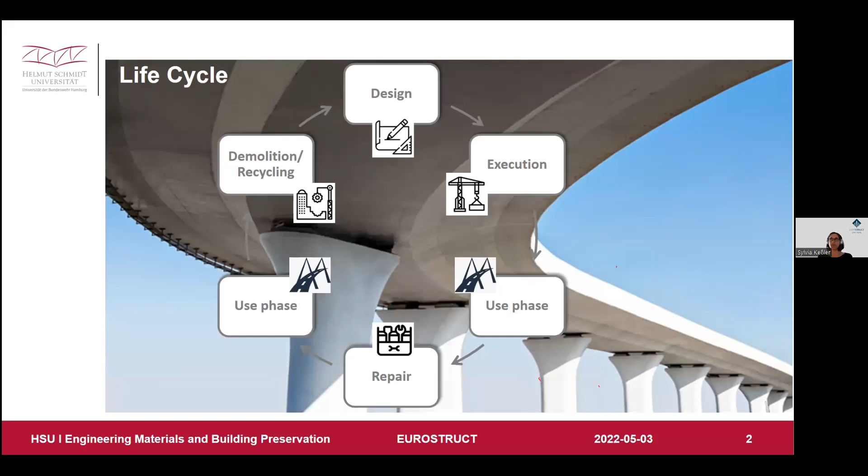Now, since today's topic is reinforcement corrosion, the question arises: when are we really concerned about corrosion? When do we think the first time really about corrosion? I would assume, perhaps it's a little bit offensive, I would say you think about it first in the use phase, just when you start to see it.

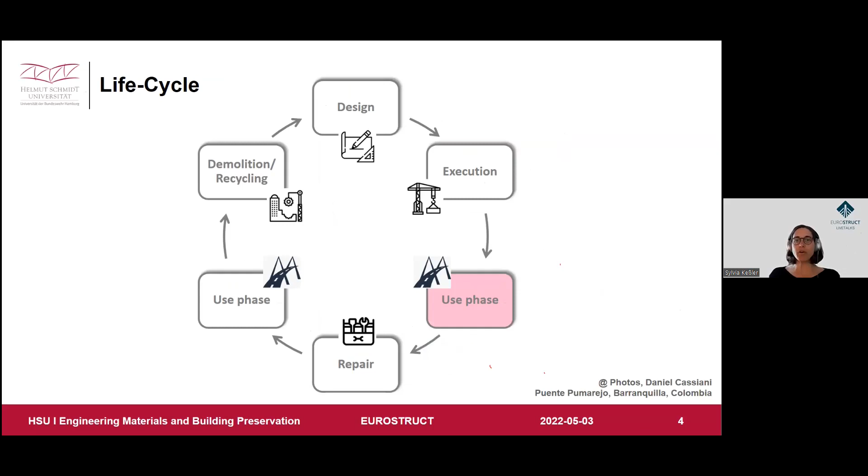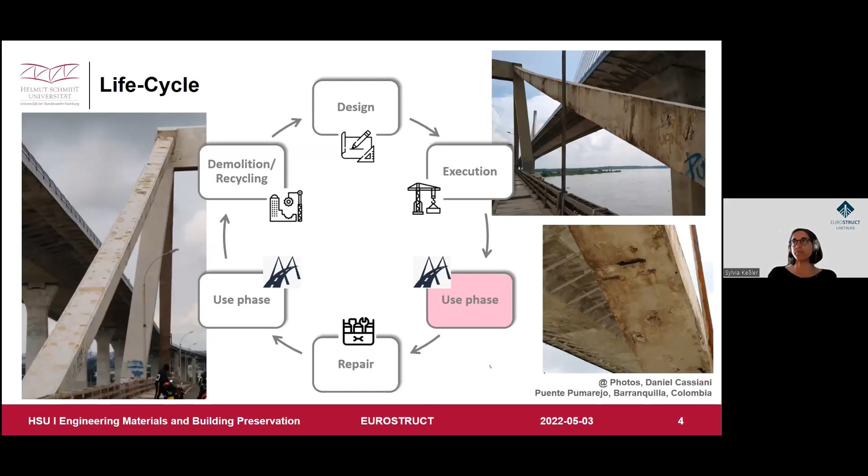Now you're thinking, are we still safe? What is really the condition of the structures? But is it the right time to think about corrosion? We need to think about it much earlier, already at the design stage.

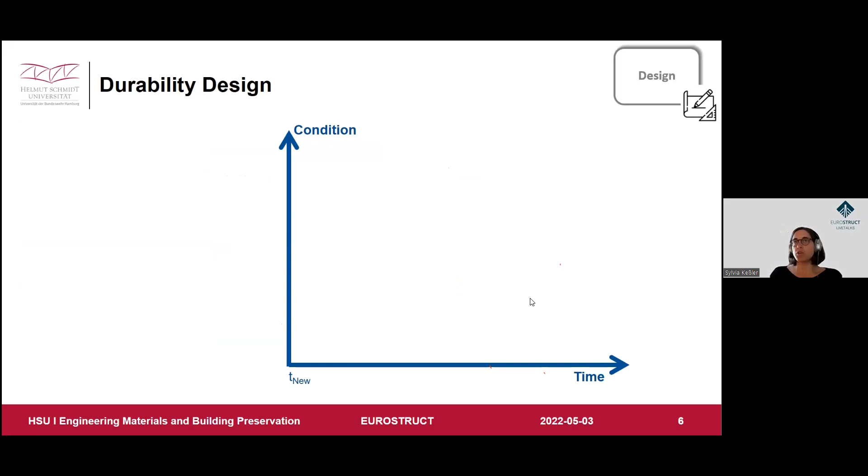But what do we do normally? We are a little bit, how to say, used to just apply the exposure classes according to the Eurocode. We know that we have a certain service life that we need to ensure, and a certain condition. During this design stage, we think, okay, we have our service life, let us just apply the exposure classes.

Since we talk today about reinforcement corrosion, we have only to consider the XC, XD, and XS classes. For those not familiar with the Eurocode, since I'm talking from that perspective, this class is concerned about carbonation-induced corrosion, here about de-icing or the ingress of de-icing salts, or the ingress of salts from the marine environment.

We are very used to choosing just the concrete composition or the concrete cover depth, which is assigned to each exposure class. This is how we do it for years now in Europe, and we apply it, and we do not think about corrosion anymore. But whether this ensures at least a minimal nominal condition, we do not really know.

The descriptive durability design will give us no further clue. What we could do is apply probabilistic models in order to estimate our reliability or failure probability.

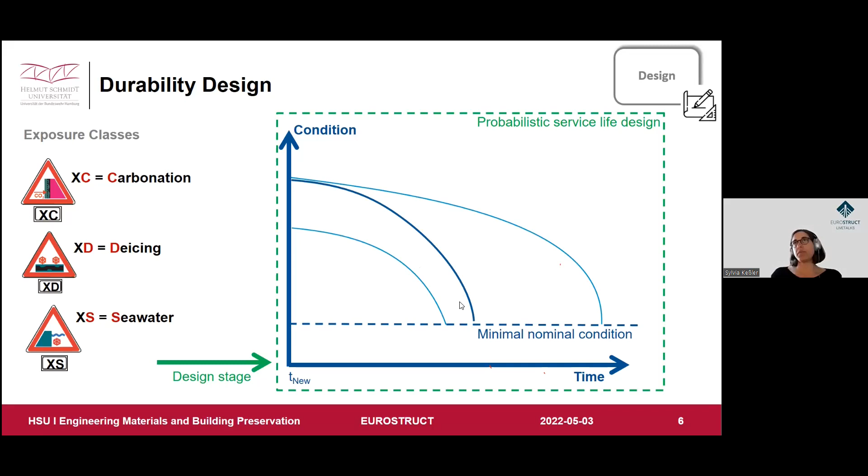Every time I talk today about failure probability, it's always meant as corrosion probability, so the probability of reinforcement corrosion. What we did in Germany, at least I used as background information for all the probabilistic modeling, because I do not want to go into detail during this talk.

You will find the FIB model code for service life design, the model code 2010, and you will have some more further information in the more recent Bulletin 76, which supports you if you would like to do your probabilistic modeling yourself.

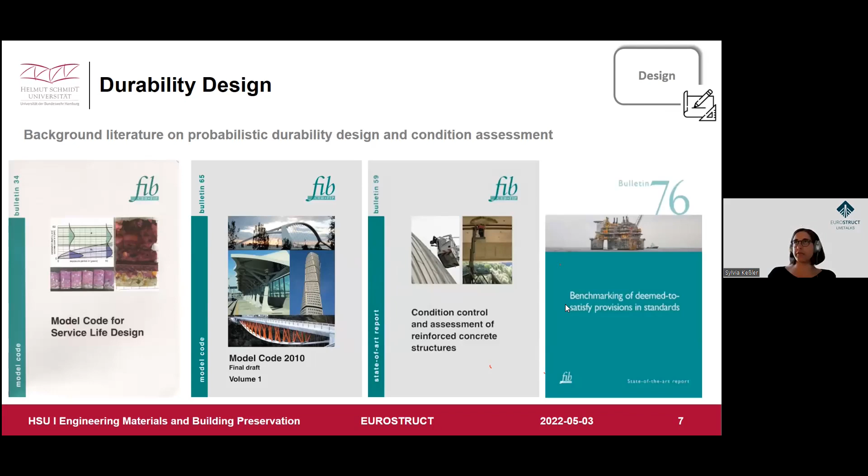We had a project going on in Germany, and we would like to consider what are really the exposure conditions we have in Germany. On the northern part, we have the seas, the marine environment, so here we have really to be concerned about chloride-induced corrosion. In the south part, we have a lot of snow, harsh winter times, and here also a lot of de-icing salts are applied on the streets to ensure traffic safety.

We looked at what are the typical stresses we have with regard to corrosion, and we compared this to the material resistances which are allowed according to the Eurocode. The result was kind of surprising.

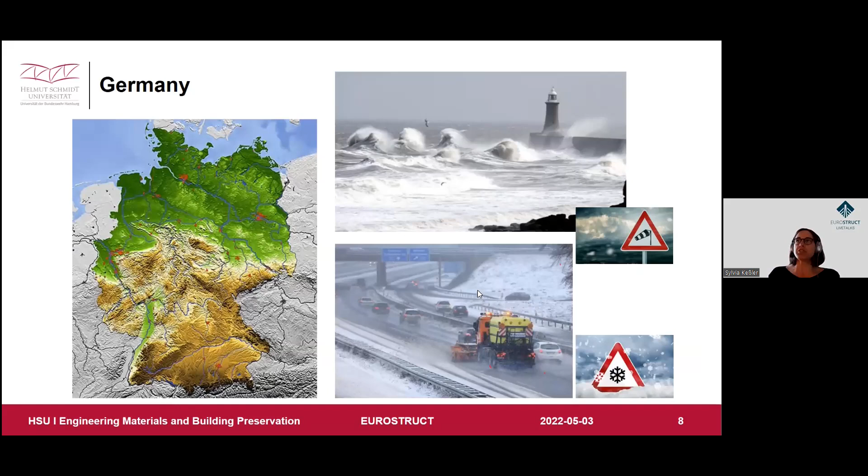As the next step, normally, if you have a reinforced concrete structure assigned to exposure class XC4, especially for bridges, it's normally also XD3. And since XD3 requires harsher material resistances, you have to build a better concrete, which also normally has better resistance against carbonation.

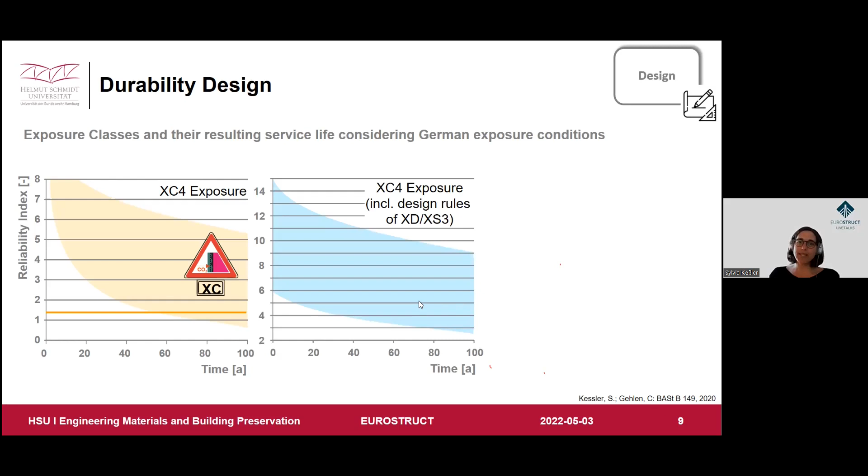But at the end, the most important thing is what's going to happen with the XD3 or XS3 exposure. Under this exposure class, we normally have cyclic wetting and drying in combination with exposure to chloride ions, and this is the most severe environment you can have when concerned about reinforcement corrosion. You see that the scale of the reliability index has already changed.

This is the range of reliability you can get just applying the Eurocode exposure class rules in order to ensure normally a service life of about 50 years. You see here the normal limit state, the reliability index of 1.3, which is equivalent to more or less 10% of failure probability, so 10% of corrosion probability.

Looking at this diagram on the right-hand side, if you are in charge as an asset owner of bridges, you need to be concerned about reinforcement corrosion. This is so likely to happen, especially if you have exposure class XD3 or XS3. So you have to face reinforcement corrosion with a very high probability.

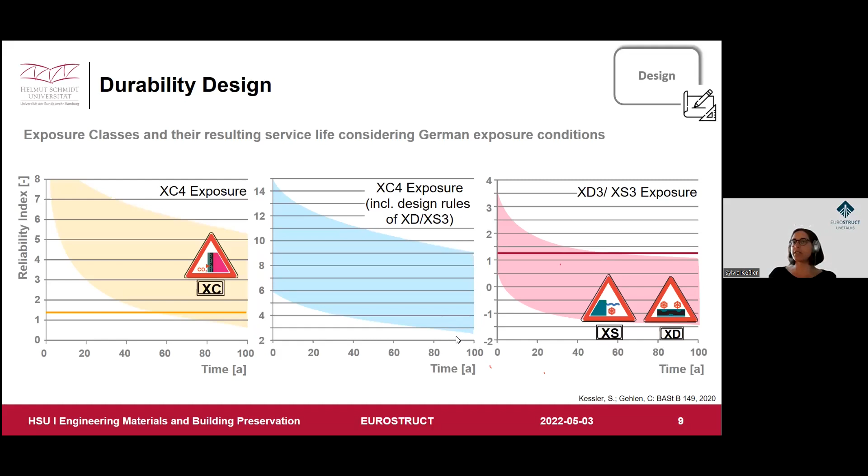We're concerned that our prescriptive durability design rules are not able to ensure a repair-free service life, which they should. Hopefully we will change soon from our prescriptive durability design rules to load and performance-based durability design rules, which is already in preparation. So we have very high corrosion probability, which means we have to be concerned, especially during inspection and monitoring, about what kind of methods we can apply.

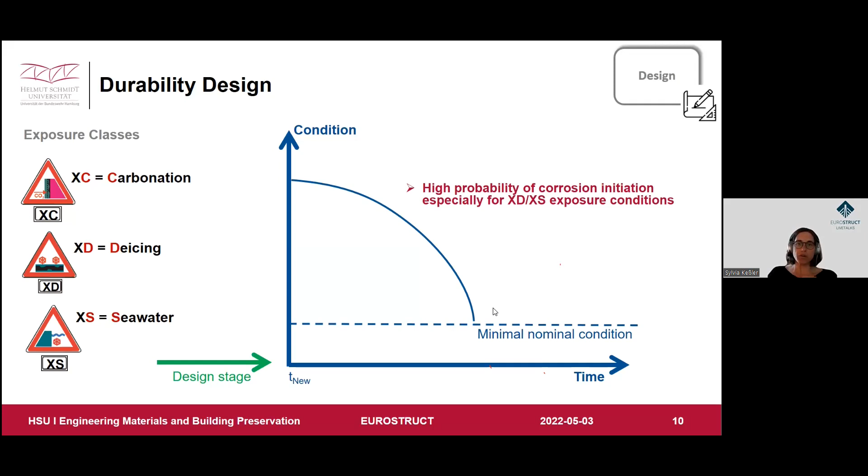So what is really the mechanism when we look for reinforcement corrosion? You probably have seen the Tuutti diagram several times already, so we have the initiation phase and the propagation phase. The initiation phase ends with the depassivation of the reinforcement.

Here I bring you some comparable sketches, because normally the concrete provides high alkalinity, which leads to the formation of a microscopic oxide layer. With this passive film, as we call it, we have corrosion protection.

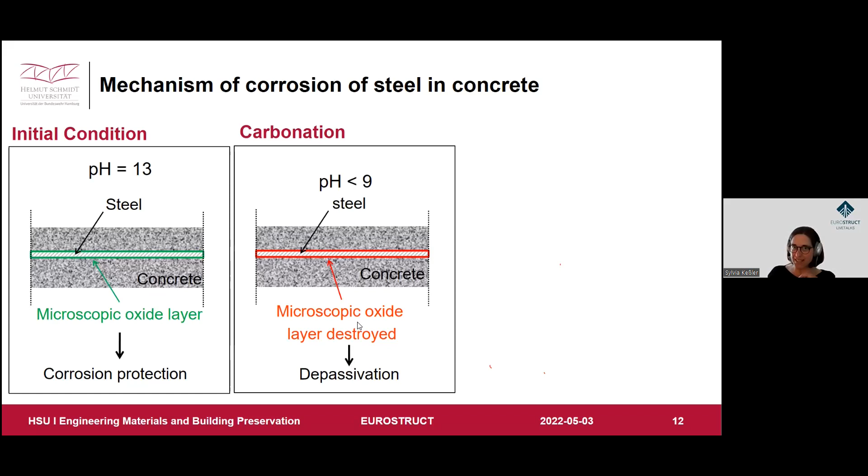Now we have two mechanisms, which we already heard from the exposure classes. We have carbonation, which leads to the process that the alkalinity gets lost, and the microscopic oxide layer, which normally prevents corrosion, dissolves. So we have a depassivation. The steel is able to corrode, which does not mean that the steel will corrode - other boundary conditions have to be fulfilled.

For the more severe condition, the concrete is still in an alkaline condition, which is often forgotten - it's still alkaline. But we also have chlorides in our system, mostly from sodium chloride from marine environments or de-icing salts. They penetrate through the concrete until a critical threshold is reached at the reinforcement level, and there the microscopic oxide layer will be destroyed locally. So here we have the typical corrosion, which also leads to depassivation of the steel.

All these processes take time. This is something we can see in the Tuutti diagram as well. But what is really the difference between both mechanisms, the carbonation-induced corrosion or the chloride-induced corrosion?

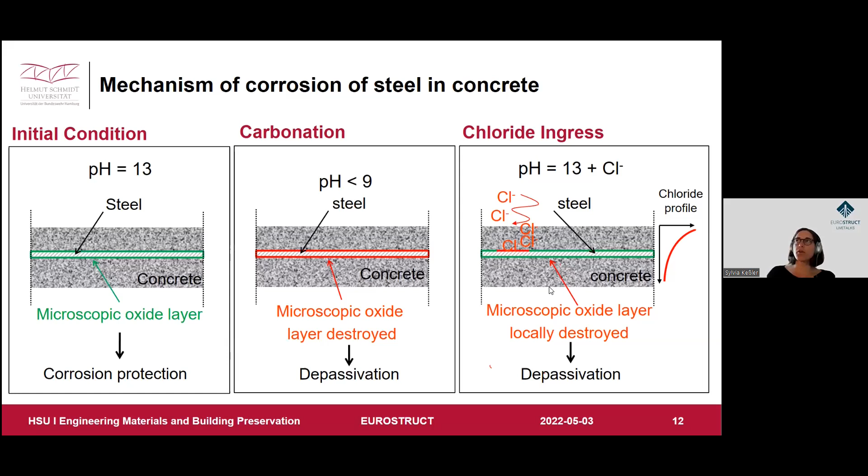Normally we have a very homogeneously distributed depassivation of the steel, so very uniform corrosion, whereas in chloride ingress we have it very locally, as I mentioned before. Looking at the anodic partial reaction and the cathodic partial reaction, these take place at typical different locations. Here it's very distributed equally over the whole reinforcement, whereas for chloride-induced corrosion we have a concentration of the anodic partial reaction leading to the typical pit, which leads to other complications for structural engineering.

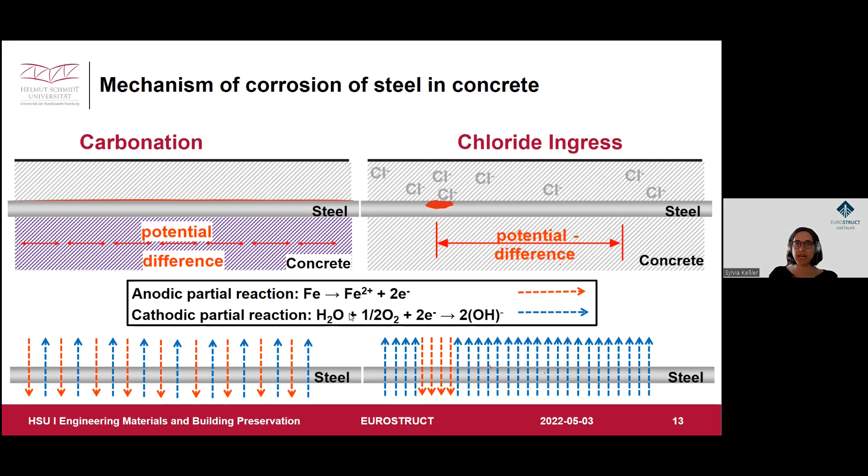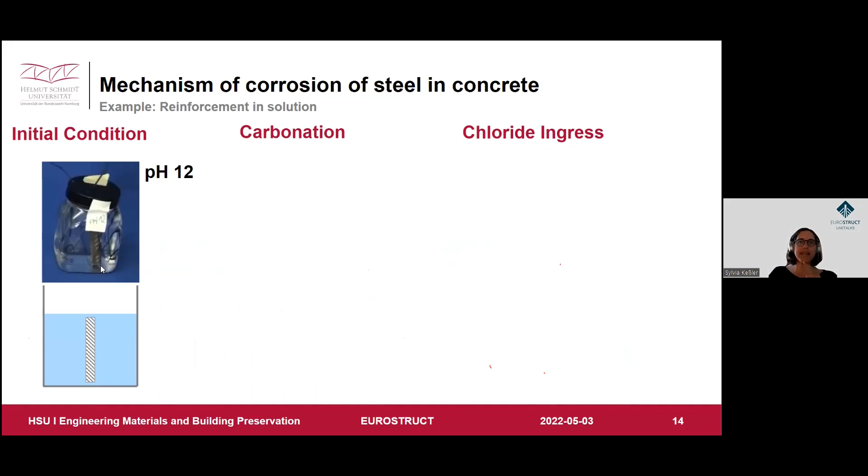And here I promise this is the last chemical equation you will see today. So what I normally do for my lecture is place a normal reinforcement just in a solution with a pH of 12, comparable to the concrete. Here you see the sketch, the water is still colorless, so there was no corrosion product at all.

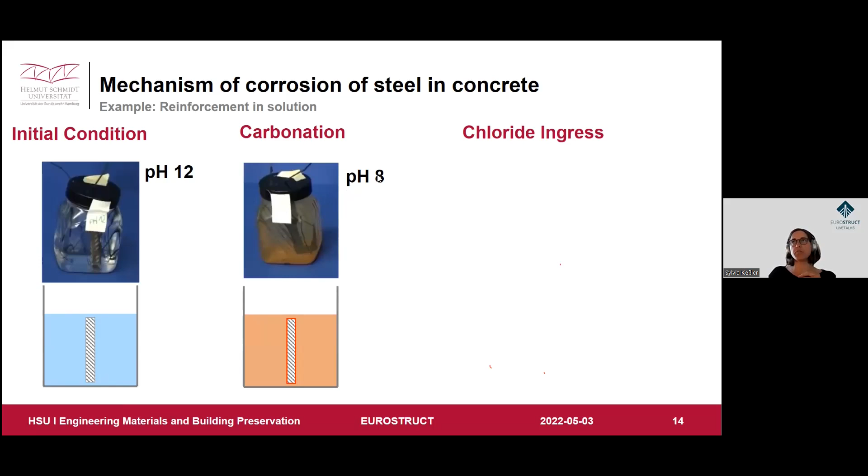From the carbonation, we place a reinforcement in a solution with pH 8, comparable to carbonated concrete. Here we see the brownish color, so a lot of iron oxide has been produced, the typical rust. For chloride ingress, we prepare a solution with pH 12 and add sodium chloride to it. Here we can see some iron oxide products at the bottom of the container.

As soon as we have corrosion, we have a flow of electrons, which you can measure easily as a current. If we do not have any corrosion at all, we won't have any current. For the carbonation case, we measured the current and ended up with 0.36 milliampere. Now you can think, do we really need to be concerned about a corrosion current of 0.36 milliampere? Especially since it's just a current - normally we have to calibrate it against the area to get a corrosion current density. Is it really a lot, or not?

What does it really mean if the structure still has to serve for 30 or 50 more years? And what would you assume now for the corrosion current for chloride-induced corrosion? Do we have any experience? Guess a number, and I will show it directly. Here we have a corrosion current of about 7.39 milliampere.

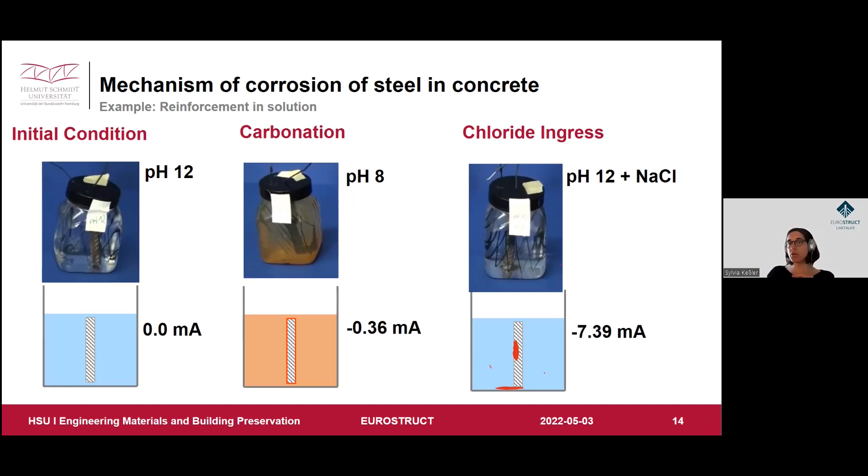So now we know what leads to depassivation, but other boundary conditions have to be fulfilled in order that corrosion can start. We need the electric conductivity of the steel, which is typical and cannot be prevented at all. All reinforcement is normally electrically connected within the reinforcement structure.

We need a certain ionic conductivity of the concrete, so there must be a certain moisture in the concrete, which is normally no issue at all for bridges exposed to weathering. We have normally sufficient ion conductivity. We need oxygen, and normally we have enough. And we need a certain driving potential. Normally all these five requirements are fulfilled easily.

So probably for bridges, with very high probability, as soon as we have deep depassivation, we will also have initiation of corrosion. Keep in mind, all these five basic requirements need to be fulfilled at the same time. If we are able to exclude one of these basic requirements, no corrosion can take place. This is just a clue on how to repair the structures and how to prevent ongoing corrosion.

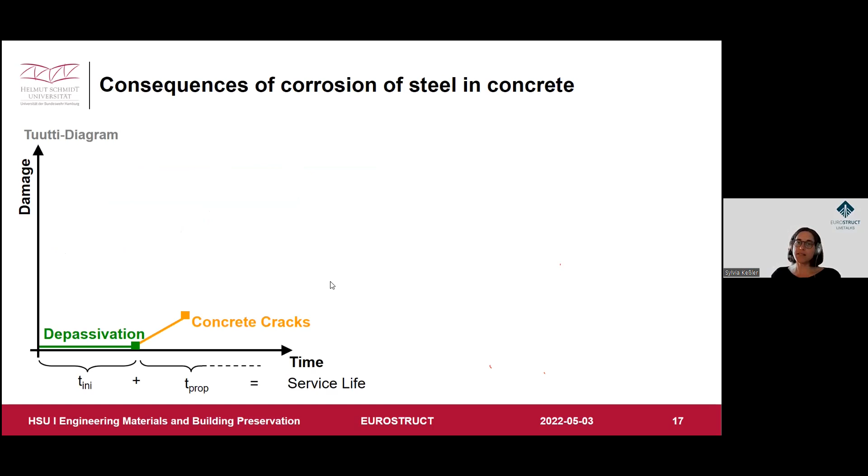So next step, I come back now to the Tuutti diagram. As soon as corrosion is going on, iron products and iron oxide are produced, which need a much higher volume, leading to stresses in the concrete. As soon as all the pores in the concrete are filled with iron oxides, and more iron oxide is produced, the tensile strength of the concrete is exceeded very easily, which leads to concrete cracking, and afterwards to concrete spalling, loss of bond, and loss of cross section.

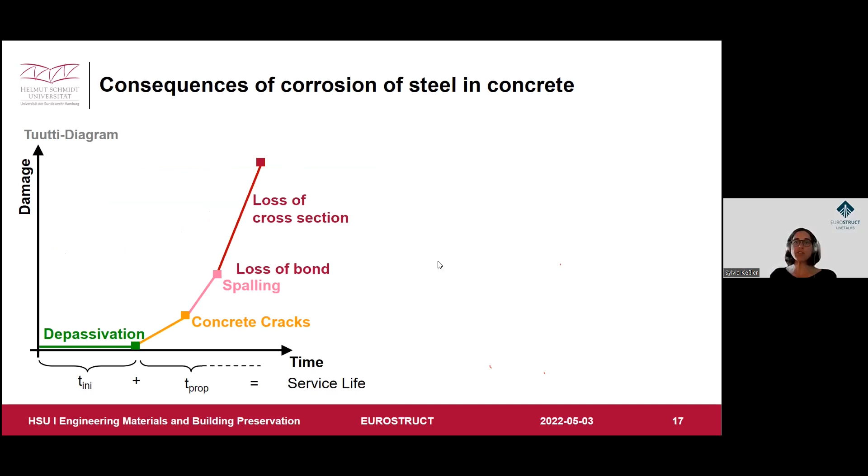Here on the right-hand side we see a picture, which I also like to show normally in my lectures, because here you see all the different steps for the different damages of corrosion-induced damage. Here you see the concrete corrosion cracking, a very clear crack, and the brownish color coming out of the crack, which gives us a hint that here's iron oxide, so corrosion is going on.

Here's spalling, you see the loss of cross-section, and following the shadow, you can see that here's a reinforcement totally missing - it has gone due to corrosion. This picture is from a very, very old concrete bridge from the 50s, and you see very nicely how all these different damage situations look like.

Just from the point of depassivation to concrete cracking, this is the most difficult point to guess the condition of our structure, because corrosion is not visible. If we do not see any cracking, we have no chance to assess corrosion just from visual inspection. This is a critical point where you do not know if your structure is corroding or not.

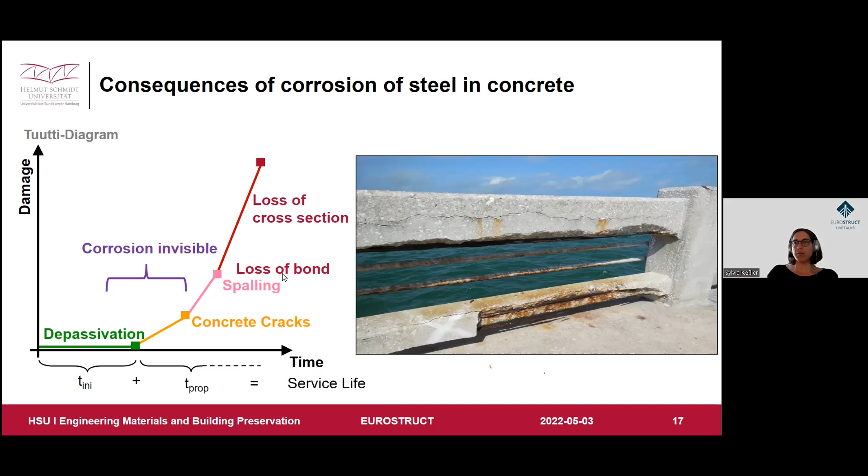So coming back to the life cycle, now we understand the mechanism. We also know that probably the prescriptive durability design rules of the Eurocode are probably not the best way to ensure it. We have another issue with execution, because all the exposure class design and probabilistic modeling relies on having a perfect, crack-free concrete. We know that due to execution, we can have problems with shrinkage or other issues which lead to cracking, and any concrete cracks would enhance the process of corrosion initiation and shorten the service life much more.

But now we are at the use phase, and we know that we have a certain stage or time where we do not see the corrosion. So what can we do? We have here once again the time over the corrosion. Sure, we need to inspect, and we need to inspect frequently in order to get the chance to see how the damage is developing over time.

We also have monitoring, which you can do continuously, even though corrosion monitoring is not so established. We have sensors available to do corrosion monitoring, and I hope it will increase much more in future. But currently, I know very, very few bridges where corrosion monitoring is applied.

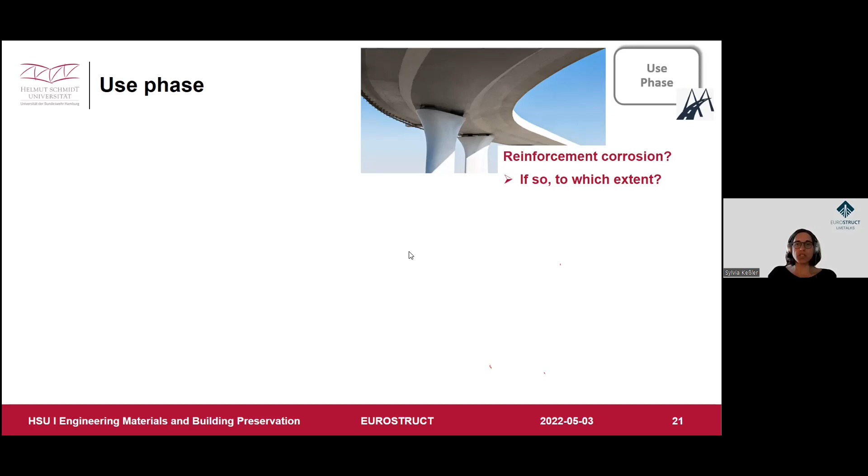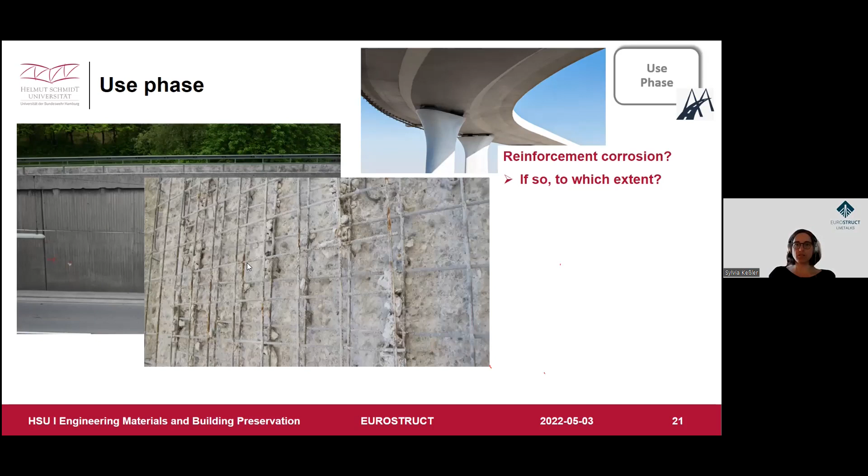Due to some other maintenance issues, they also started to do a corrosion condition assessment, just occasionally, not by intention. They ended up looking at the reinforcements and had to do a total repair, because with a closer look during the repair, you see serious loss of cross-section due to corrosion. We had seen nothing from the outside. The abutment wall is more than 200 meters long on both sides of the street, and you had seen nothing.

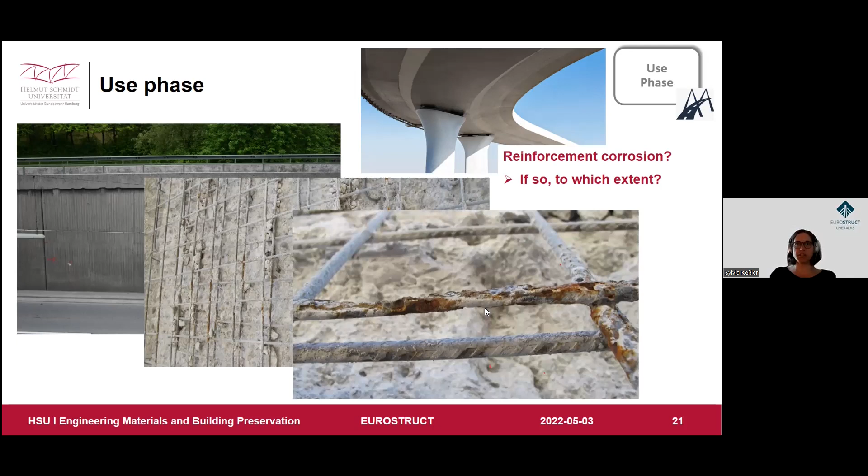So what could we do, or what did we do during this inspection in order to check the corrosion probability? The main question which you always have, if you would like to perform a corrosion condition assessment, is when you should do that. Because we also have annual changes or seasonal changes.

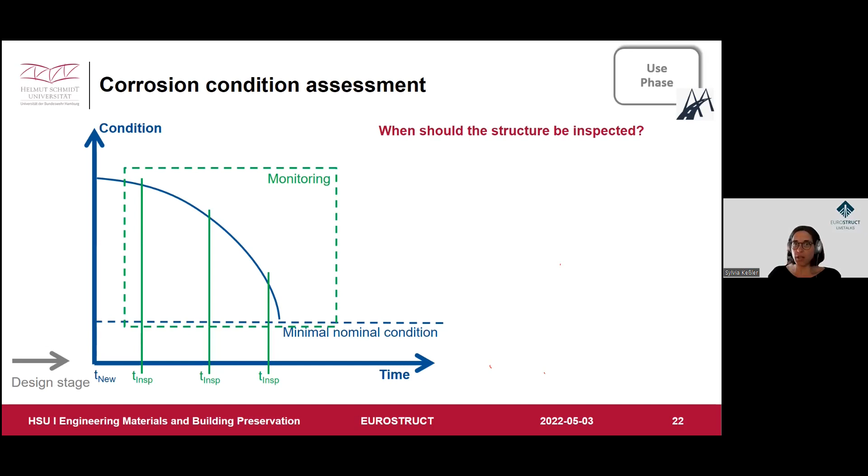Should you do it more in winter time, more during summer? When should you do that? In which frequency - every year, every 3 years, every 5 years? What is sufficient? What is the objective? What do you really want to know?

That depends also on the state - if you're still in the initiation phase or the propagation stage. This will probably change the objective of your corrosion inspection, and which parameters are of interest.

Which method can be applied, and are these methods reliable? You have further guidance here in the FIB Bulletin 59, where we compiled and tried to answer some of these questions.

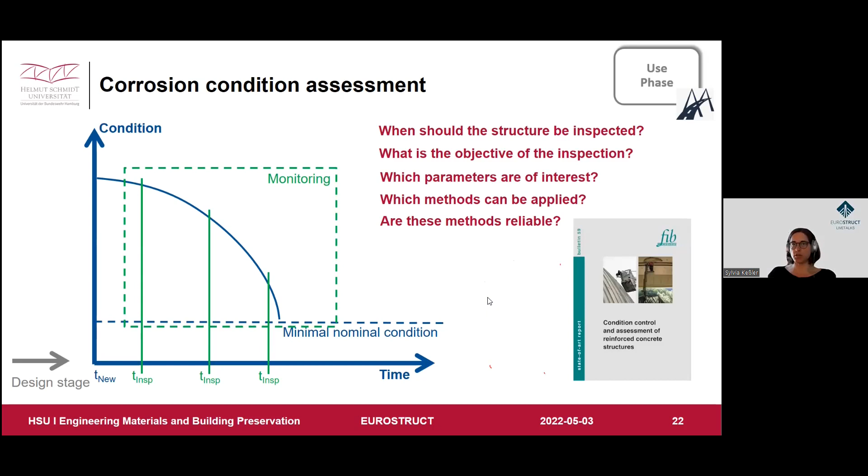So here I would give a very comprehensive overview of what is possible. Again we see the damage over time. We know we have an initiation phase and a propagation phase. What we don't know is at the interface - we probably have no clue if we are still in the initiation phase or already in the propagation phase.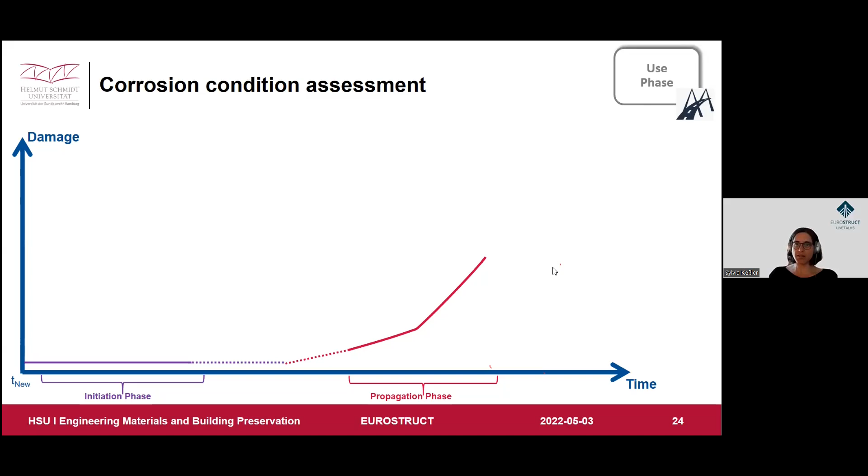What we should always do, even if at the beginning it doesn't give any clue, is visual inspection. As soon as we see anything like cracks, we need to involve a structural engineer to be sure the reliability of the structure is still in good shape.

At the very beginning, what is really helpful? What kind of parameters or data? Always the concrete cover depth, the chloride content - so you make a chloride profile. You can also measure the critical chloride threshold on a structure; it's very uncommon because the procedure is quite new, but it's now possible. And the carbonation depth - these are the most important parameters. To get them you have to destroy your structure very slightly, at least drilling a borehole to get the powder for the chloride profiles.

What do you do with the data? Out of the chloride profile, you can get the surface chloride concentration, the apparent chloride diffusion coefficient, and also a clue about the convection zone. This information enables you to calculate an a priori corrosion probability based on the model from the Model Code for Service Life Design, giving you a much better idea of the corrosion probability, or depassivation probability, of your structure. These are all inspection methods which are very easy to do.

For the chloride content specifically, there's also monitoring available. As a next step, if you know your corrosion probability has probably increased, you could apply the half-cell potential measurement. This gives you data and information - it's an inspection method which gives an indication of corrosion probability or not.

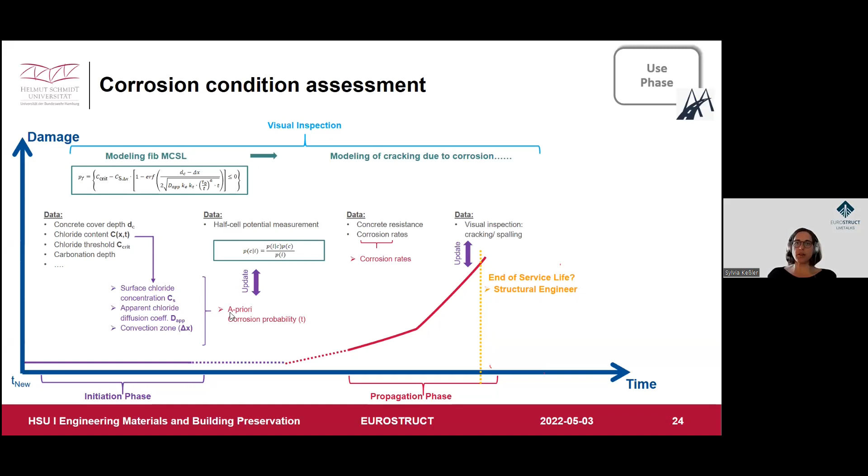Now I want to proceed with a case study so that this overview comes to life. Here I just want to come back to my abutment wall, which you have already seen beforehand.

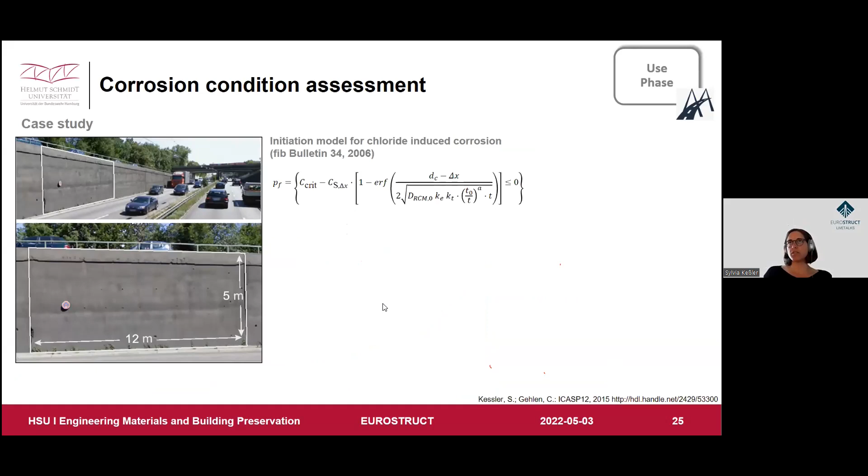Just as at the beginning, you start your probabilistic modeling to get an idea of your a priori depassivation probability. At the time of inspection, the structure was more than 45 years old, and here we have a depassivation probability for this particular structure of 30%, so a corrosion probability of 30%. It's quite high. This was the reason why we decided to do further inspection.

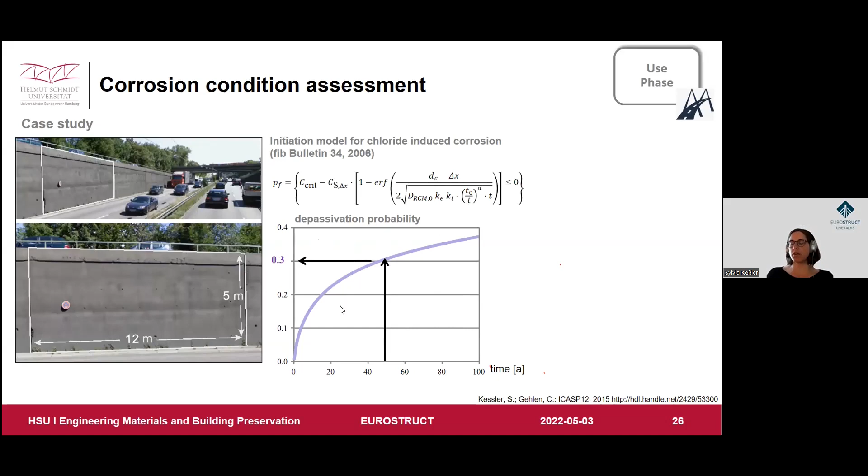Here are the results of the concrete cover. The concrete cover is slightly higher than you would expect, keeping in mind the design codes at the time of construction. We recalculated the depassivation probability with the current concrete cover depth measurements, and we could see that the depassivation probability decreased because we have a much higher concrete cover depth than expected, and now we have a corrosion probability of 22%.

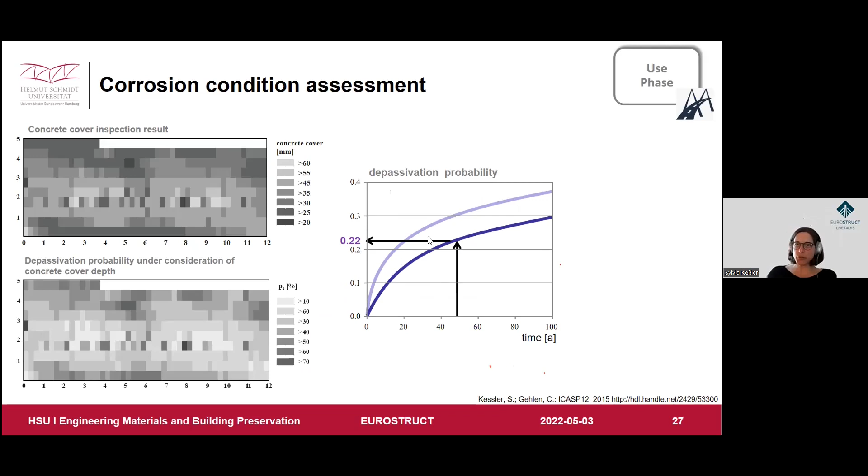Now, is 22% high or low? That's something you have to decide for yourself. Here the asset owner decided it's a little too high, so he did further inspection, and as I mentioned, the half cell potential measurement, which I would like to explain very briefly, gives you just the information you need to know.

You need to connect a voltmeter with the reinforcement, so you partly have to destroy the concrete in order to get the electric connection. Then you have a reference electrode, which measures the half cell just between the reinforcement and the reference electrode. As soon as we have a corroding spot, the potential is much lower than at the cathodic areas in the neighborhood.

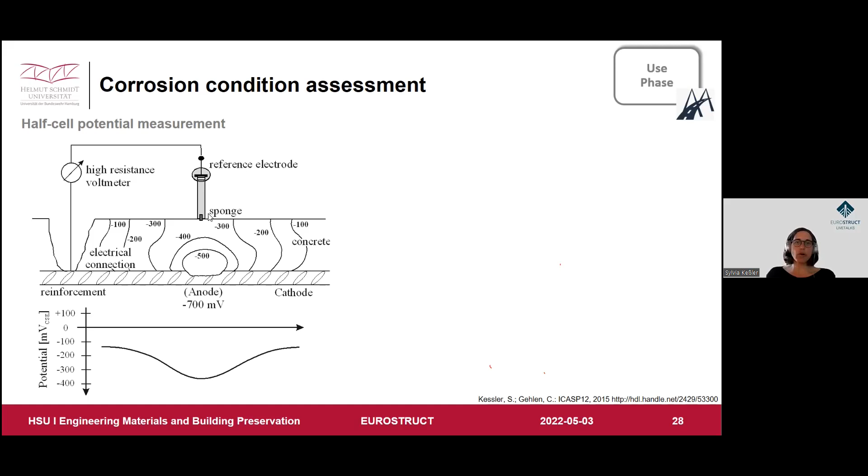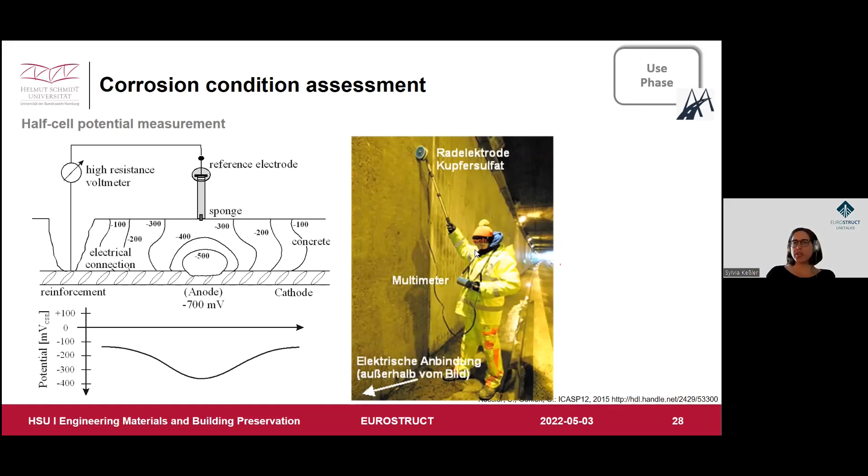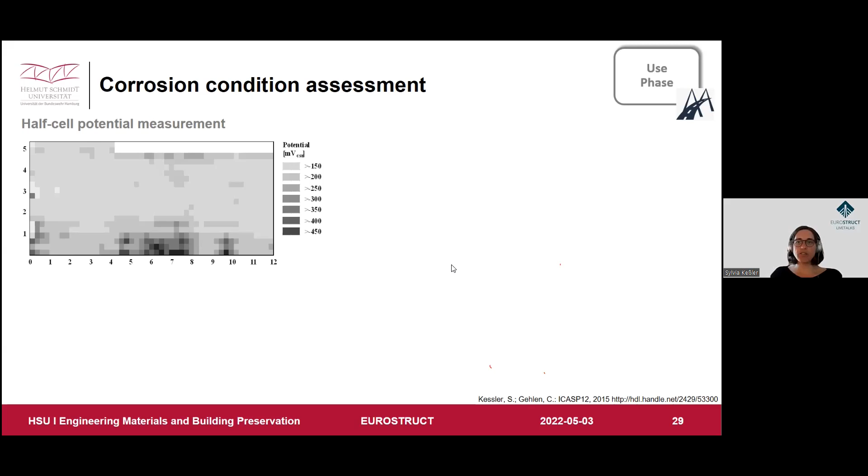But what does it really mean? How can I quantify this data? Now we need to apply Bayesian theory, which most of you probably know very well. But normally we have the problem that we cannot apply it so easily, due to the fact that this information, the likelihood that the inspection quality in dependence of the structure condition, is not known - so we mostly do not know the probability of corrosion given the condition of the structure.

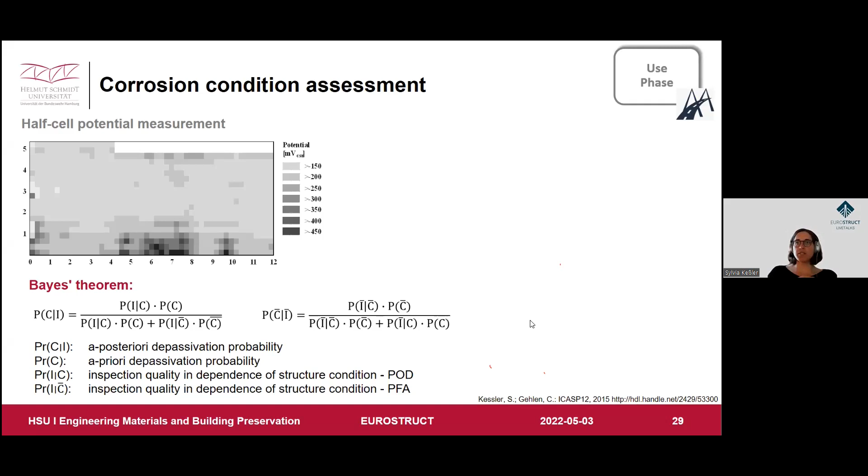For this particular issue, I did some investigations before, but first we have to think about what kind of situations we have for inspection in order to get this data. Here we have a qualitative test method. At the end, we will end up with the outcome: is there corrosion, yes or no? We have no quantitative value.

We cannot use the half cell potential itself, it's not an absolute value. We have to evaluate it qualitatively. So normally, if you have a defect-free structure and we decide that it's defect-free, so corrosion-free, it's okay. We have no costs, just costs for the inspection itself, but the asset owner can be happy. If we have a defect and we detect the defect, or we detect corrosion, it's okay. We have repairing or destruction or cost for testing.

Here now comes the much more severe situation. We have no defect, but we detect the defect, so we detect corrosion - unnecessary repair. And the worst case would be that we have corrosion going on, but we do not detect it, which could lead to very severe consequences. We all probably know some structures which collapsed. If it was due to corrosion or not is something we probably will never know, but hopefully none of us will be in this situation.

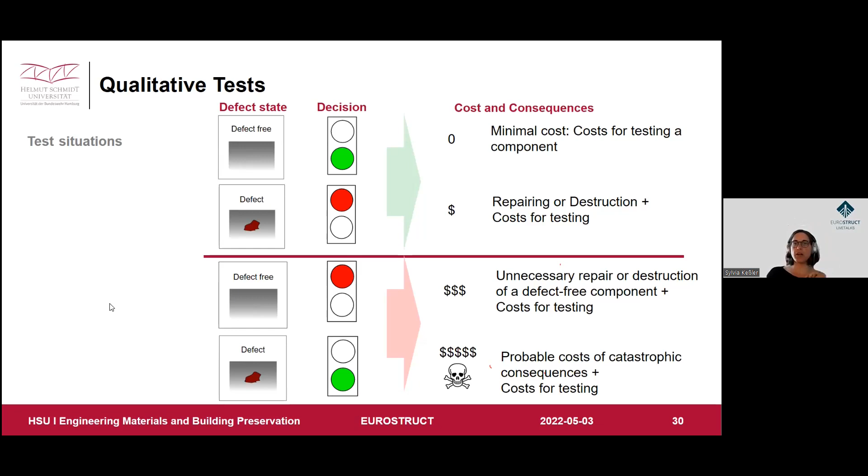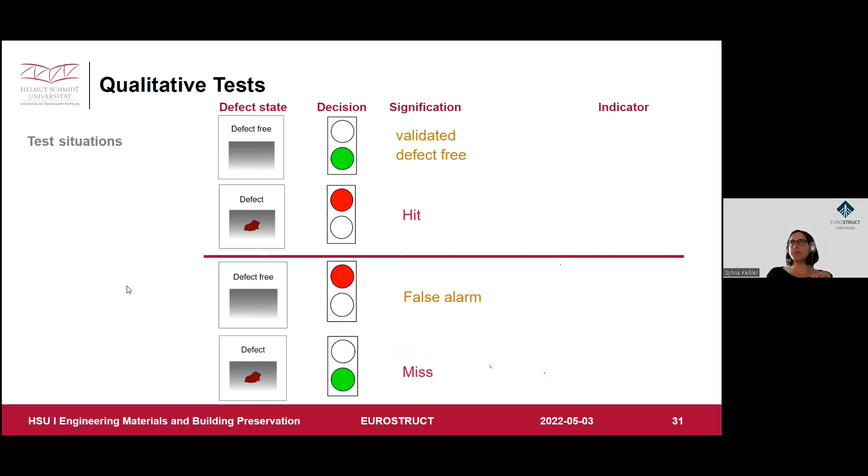What can we get out of these kinds of situations? We need the parameter, or we have at least this kind of signification and indicators, to see what we call a hit or what we call a miss. Both the hit and the miss lead us to the probability of detection, which is just the likelihood we need to take for the Bayesian theory, to apply the Bayesian theory. The other one, the false alarm rate, we do not need any further - not now, but perhaps there will be also some useful application for this parameter.

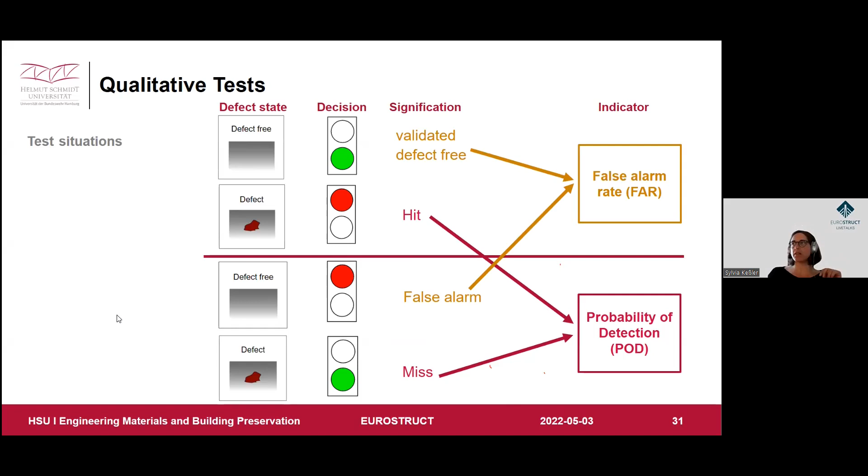Here I want to focus much more on the probability of detection, so the probability of corrosion detection, especially for corrosion detection. We did a very comprehensive evaluation of that, but I would slightly skip a little bit about the slides, having in mind the time. I think the most important slide is probably this one.

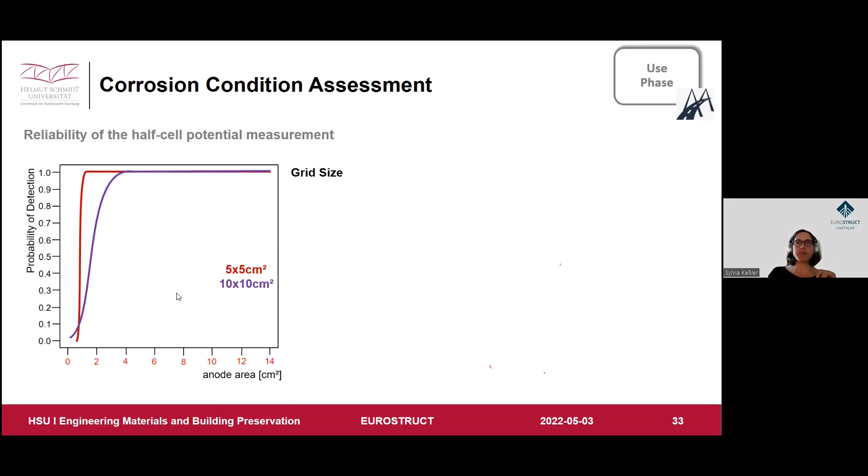We have here the probability of detection, in dependence of the defect size, which in the case of corrosion is the anodic area - just the area on the reinforcement surface where the anodic partial reaction takes place. And we have different grid sizes, so the scan size of your electrode, and you see that the probability of detection decreases with increasing grid size. This is typical, this is something you would expect probably.

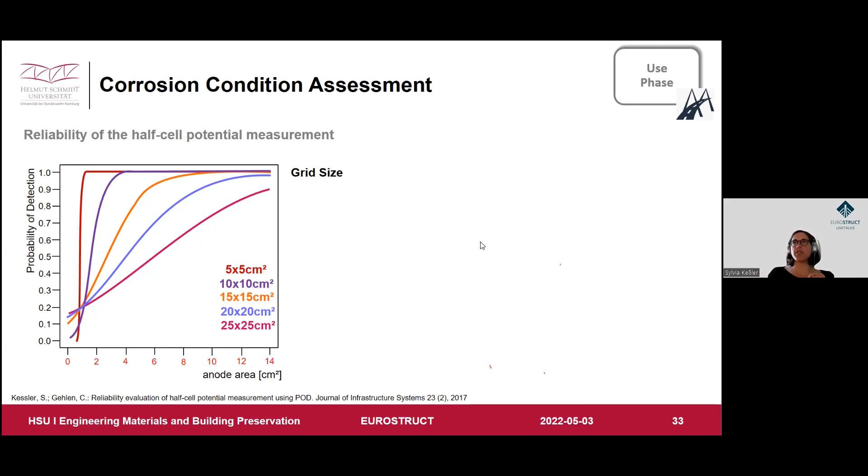And now we can take this data to apply the Bayesian theory, so we are now able to have the information about our likelihoods. This is also part of the evaluation from the slides before. Here we took a grid size of 25 by 25 square centimeters, which we did on the structure, and we assumed a concrete resistance of 400 ohm meters, and then we will be able to define our values which we need. By applying the Bayesian theorem, we can tell now, as soon as we indicate corrosion by the half-cell potential measurement, we know our corrosion probability increases from around 22% to more than 60%. And as soon as we do not indicate corrosion from the half-cell potential measurement, the corrosion probability decreases slightly.

So now, look here at the spots. Now we have here very high corrosion probability, or we have a very high indication, I would say. Then we could derive that we have a depassivation probability of above 60%. Now you need to be really concerned - the 60%, I think this is still a lot.

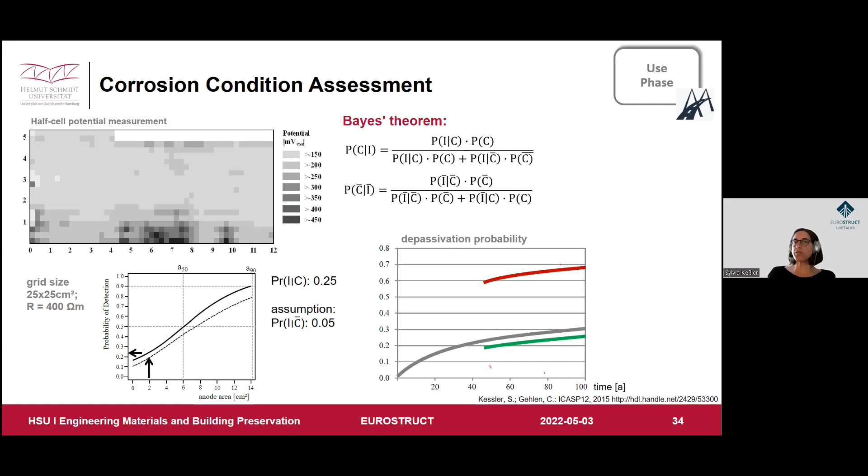We can also work further with the real data which we see here. We do some statistical analysis, and here I do not want to go into too much detail - this is also published in the conference paper you see beneath. Later on, we are able to transfer the half-cell potential measurement directly into a corrosion probability, so this is a failure probability, corrosion probability.

Now you really get a clue. You have a quantitative evaluation of the corrosion condition assessment of your structure. And you can easily see where you have a really high corrosion probability, about 80%, and which parts do not show a corrosion indication at all. With this data, you can really work for further inspection, can work for further repair, and you have quantitative values.

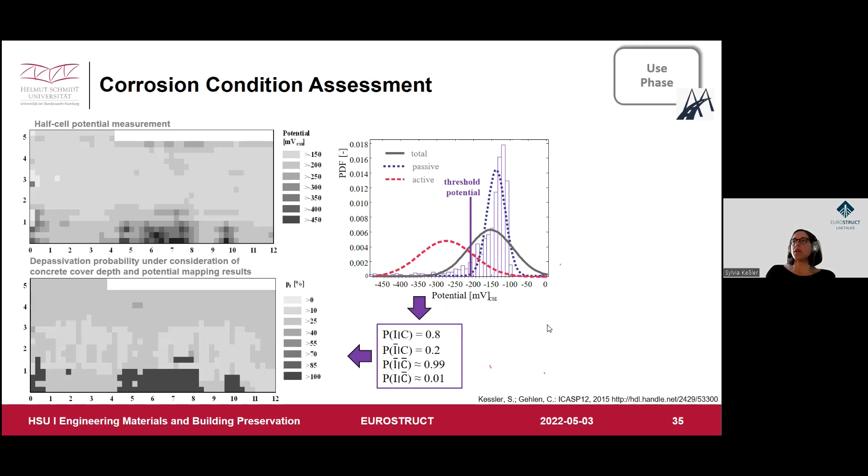Nevertheless, here we had the chance to look also on the reinforcement itself due to the total repair of the structures, and you see here again the same information you saw on the slide before. On the diagram, I want to show you the parts where we indicated loss of cross-section, where we have a clear sign on the reinforcement itself that corrosion was going on. If we compare both, you can see there was a very good agreement between what we predicted as a high corrosion probability and what we really had as signs of corrosion at the reinforcement itself.

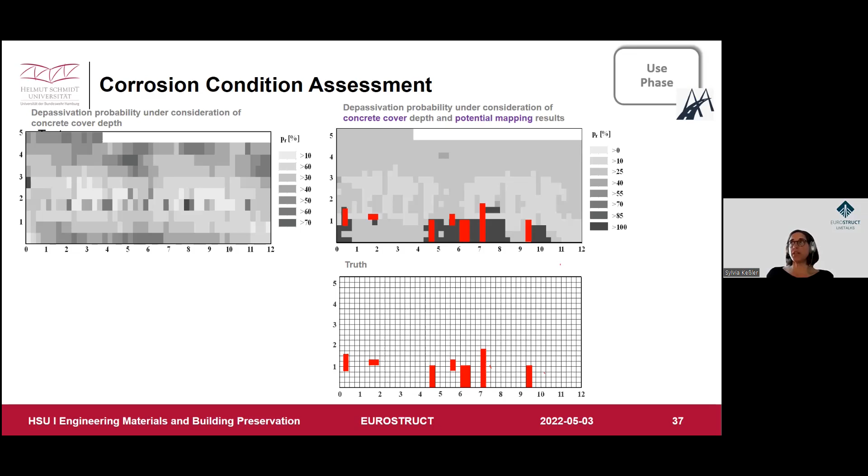So I'm really in favor of this method. This gives us really quantitative data on the corrosion condition of structures. This is just a case study, and I want to move on because we still have to talk about one or two phases more. I would like to continue for the repair, but keep in mind, I would also like to keep an eye on the watch and keep it short for the repair.

Here I want to come back on the basic requirements. Keep in mind, you have to exclude one of these factors just to prevent corrosion. The easiest is that you prevent the possibility of iron dissolution due to carbonation or chloride ingress. So you have to exclude the chloride or exclude the carbonated concrete, by doing a total replacement of your concrete. You can also apply cathodic protection systems, which exclude the driving potential and also exclude the possibility of iron dissolution.

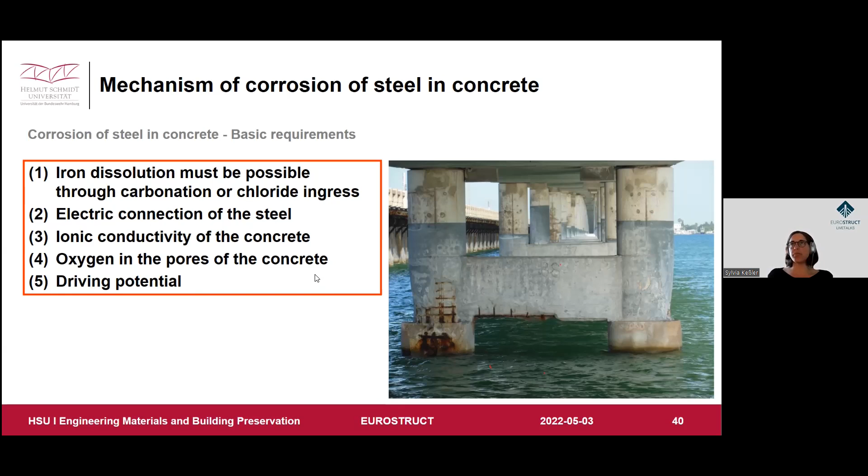Normally how you proceed, you need your condition assessment, which we have seen in the slides before. You need to know the cause of the damage. Easily, we just talk about reinforcement corrosion. What is really the objective? How long is the remaining service life of the structure? Is it 10 years, 20 years, or 50 years? This makes a difference for your repair. What is the repair principle you would like to follow, the repair procedure, and what kind of material is appropriate in order to fulfill the repair principle.

We have different options. You can do a total concrete repair or replacement. You can do concrete coatings, and you have to do it several times normally, or you apply a cathodic protection system. You have different options. You just have to think about when to apply it and how often you have to do it in order to achieve the remaining service life. There are plenty more options, but this is just a first view on that.

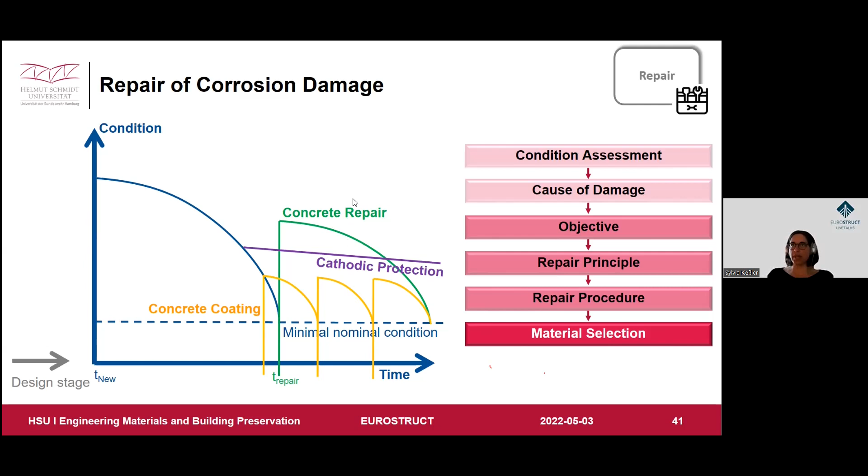Here again, I want to skip a little bit on the slides with a look on the watch, and I want to discuss very shortly one additional parameter which we haven't touched yet. If you look now at all the different limit states we have for corrosion, and key performance indicators, we know that due to different damage situations we have reduced resistance, which affects our reliability, which will affect directly the safety of our structures.

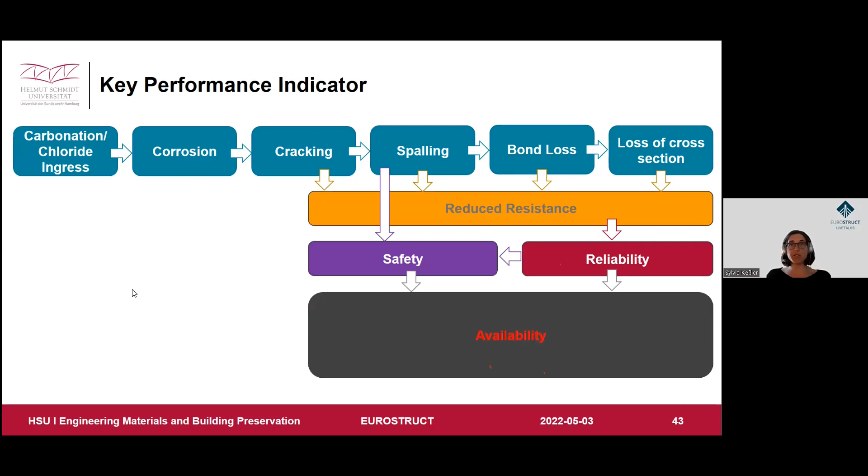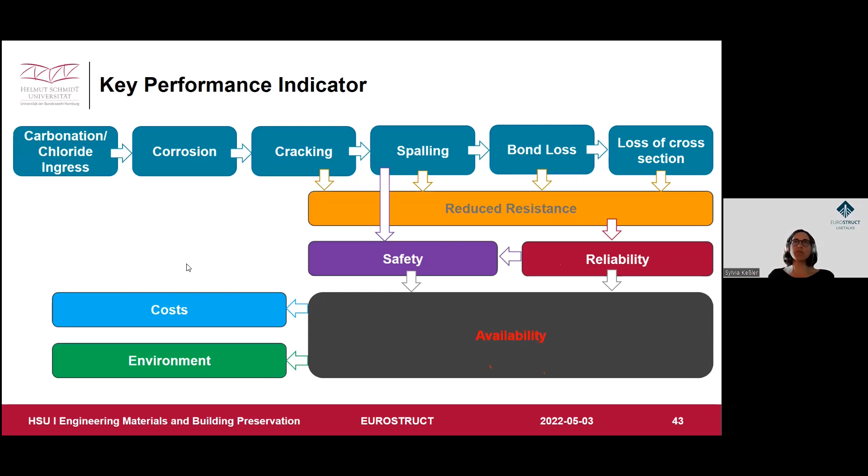Then we have probably a limited availability, and as soon as we have to apply repair, we will definitely have costs, and sure, we have an impact on the environment. Here I want to show on the next slide what is really the impact on the environment in comparison of the most popular repair methods. We have just a concrete repair, total replacement of the chloride-contaminated or carbonated concrete, in combination with the cathodic protection system, where you apply an external anode, establish an electrical connection, and then apply a current from the outside to prevent the reinforcement from corroding.

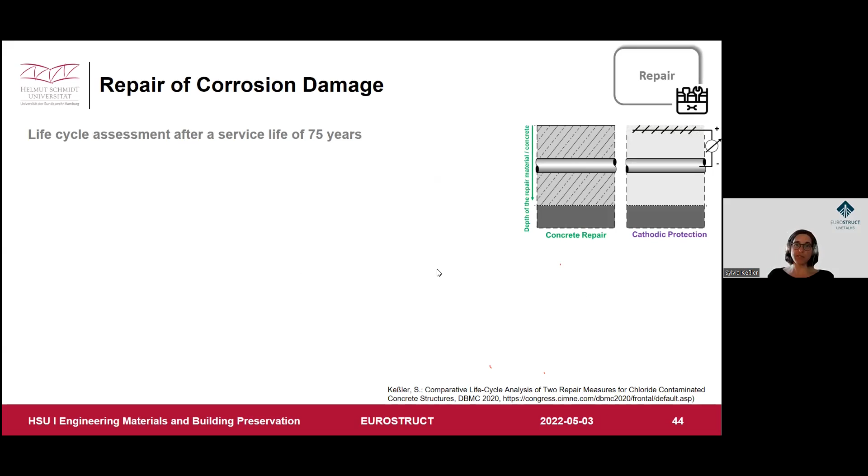You would guess cement and concrete have such a high carbon footprint. Now think about which of these methods you would guess has the poorest carbon footprint. You will probably be surprised, because here we wanted to ensure a service life of 75 years. We compared the global warming potential of the cathodic protection system with the concrete repair system, and with at least 3 of the sustainability indicators, the cathodic protection ended up much worse in carbon footprint than the concrete repair. So keep in mind, cement must not always be the less sustainable option. The problem with the cathodic protection system is that you need a lot of electronics, and you need to replace the electronics very often, and this gives a huge impact on the carbon footprint.

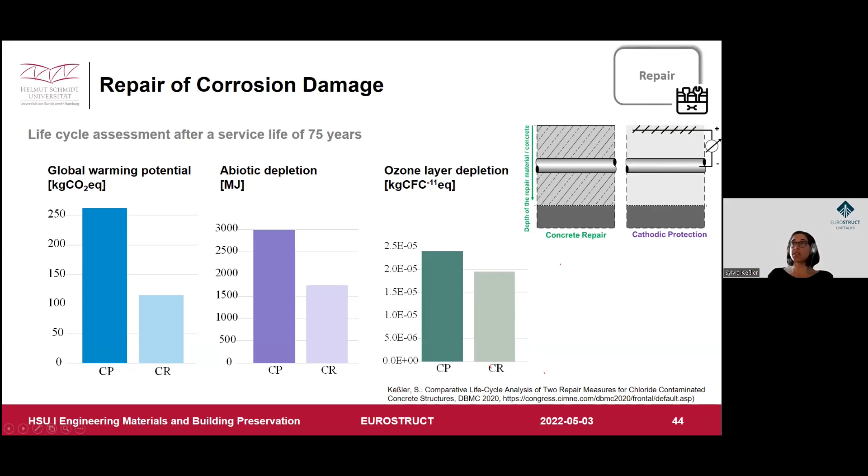This is only a sidekick to the corrosion condition assessment, and here I want to mention: more durable does not necessarily equal more sustainable.

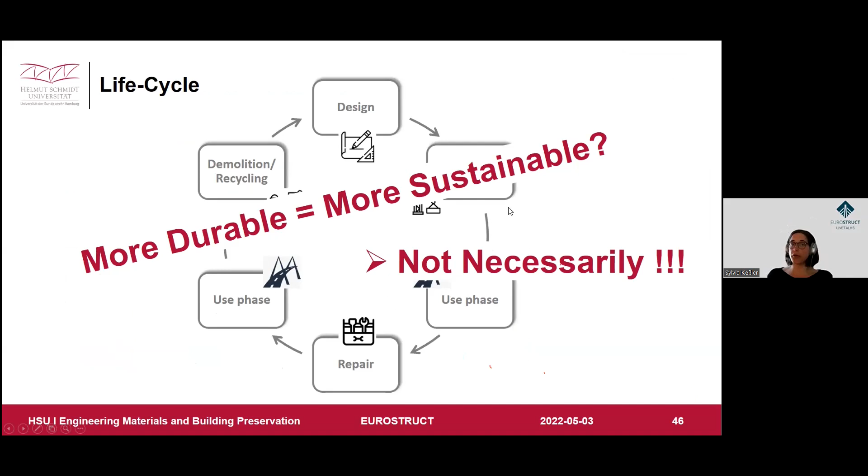We did several studies on this issue, and we have some projects going on in this field. As I mentioned, you often see people argue that more durable must be more sustainable. No, have a further look at it, as you can see, probably due to the comparison of concrete repair with the cathodic protection system.

And now we have at last completed the whole life cycle, and I want to mention we need to think about corrosion from the beginning, at the design stage, especially if your structure is exposed to chloride, which is the most severe exposure with regard to reinforcement corrosion. Do not think about it just at the use phase. Think about it at the design stage.

Unfortunately, in reality, the people in charge of the design are probably not in charge of the use phase, and this is probably where the main problem is.

Currently in a German committee for corrosion, we are preparing a body of knowledge to think about what is really the competence an engineer should have in the field of corrosion protection in structural engineering. If you have any feedback on this particular point, I would be happy to consider it in our body of knowledge, because we think corrosion is not sufficiently addressed in all the curricula and studies for structural engineering.